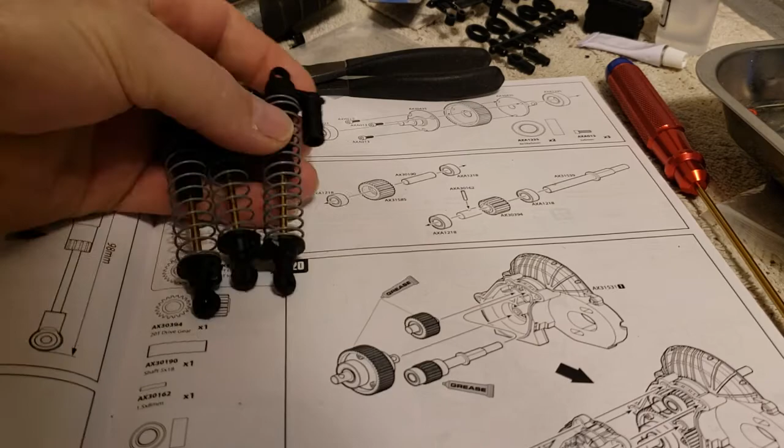I built all the shocks pretty much last night, three of them, that's all of them. But anywho, I left one.

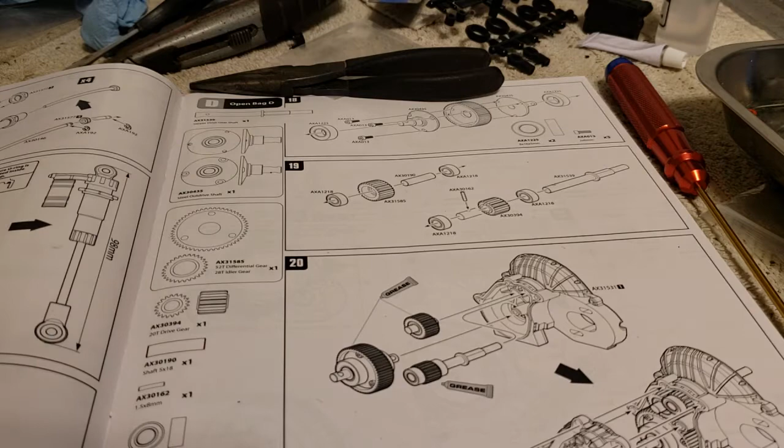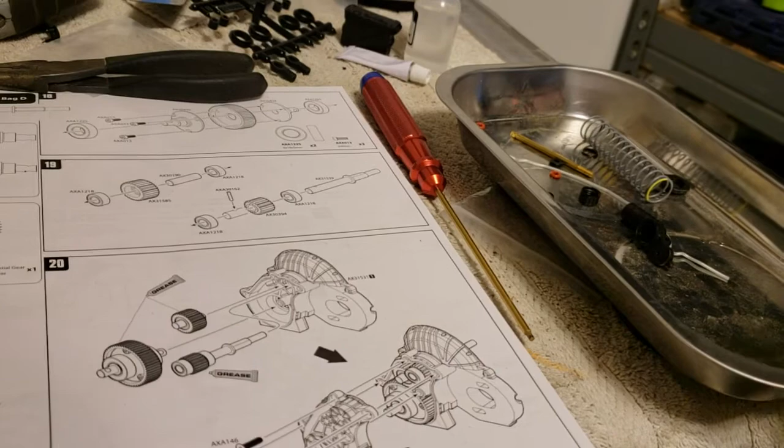Something kind of important in my opinion if you're doing work like this, especially the smaller stuff: get you one of them magnetic trays or some kind of tray that holds everything. Makes it a lot easier on you.

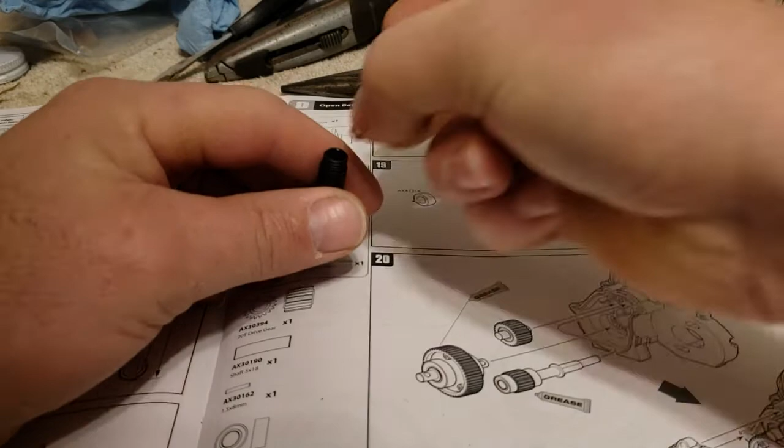Shocks are simple. There is an O-ring that goes in the bottom. There is also a little tiny hard plastic washer that comes off of one of the parts trees that goes in there as well. You have to make sure when you put that in there, you trim it really well, making sure there are no rough edges. I don't know why, other than it's a tight fit, so it kind of pushes on the exterior of the housing, which is going to oblong that little washer. So I guess I do know why, but that is that.

Put them: two O-rings, the washer, O-ring, then your cap. That's your seal for your shock, keeps your shock oil in there.

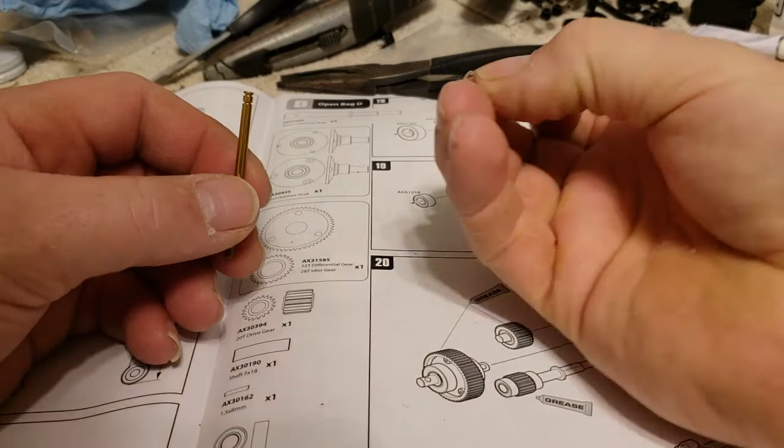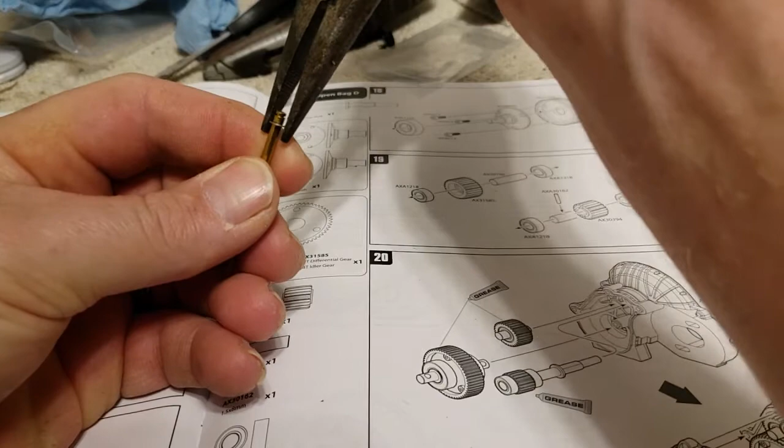Here's the sucky part: these little tiny E-clips are so much fun. Now normally I do pretty good with them, but I'm recording, so I'm sure I'm going to do really bad with them. But I can tell you, they are so tiny, if you screw up and one of those pops off, they will take off on you, which sucks.

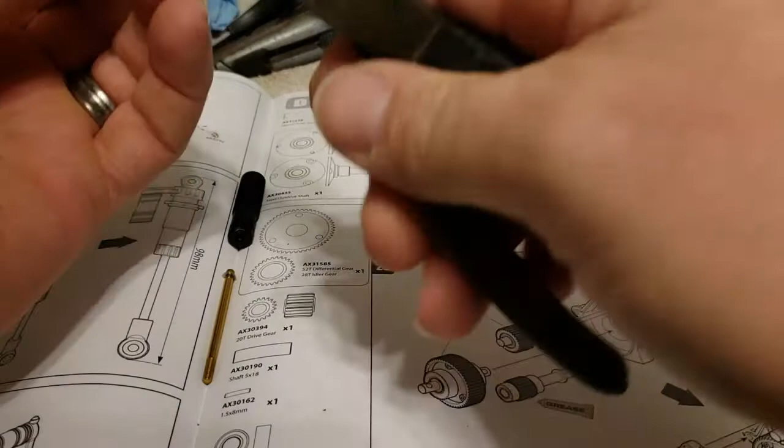E-clip, over top of the E-clip goes a little hexed part. It comes on your parts tree, and my lazy hind end did not trim that one last night. These aren't as particular, they do have a little bit of room to move, but I do not like those big chunks of plastic just hanging there.

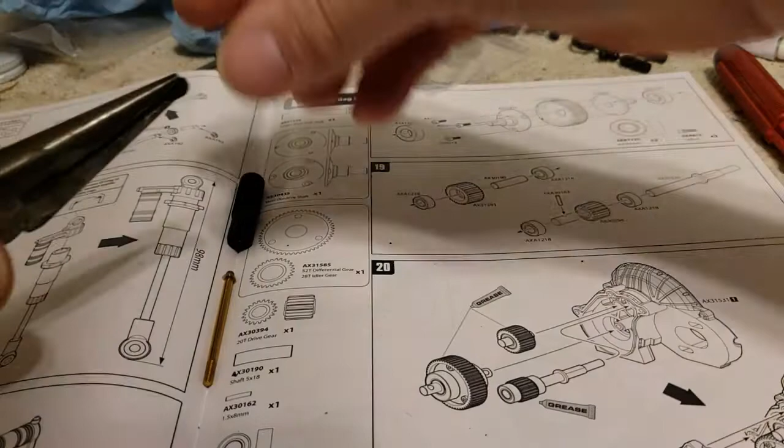All I'm doing is taking my razor blade and trimming the edge of that off. But once that's done and cleaned up, put that on right there.

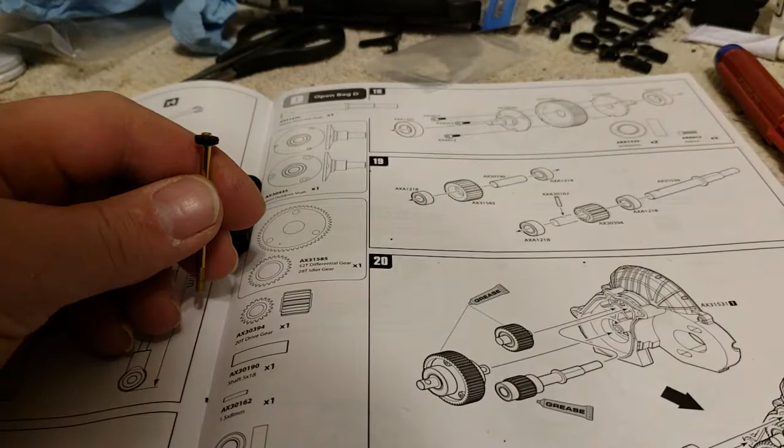Then there is one more E-clip. Monsters, so big you can't even tell when you pick them up. Lick your fingers a little bit, it'll stick right to it. Same thing there. Now I use needle nose pliers.

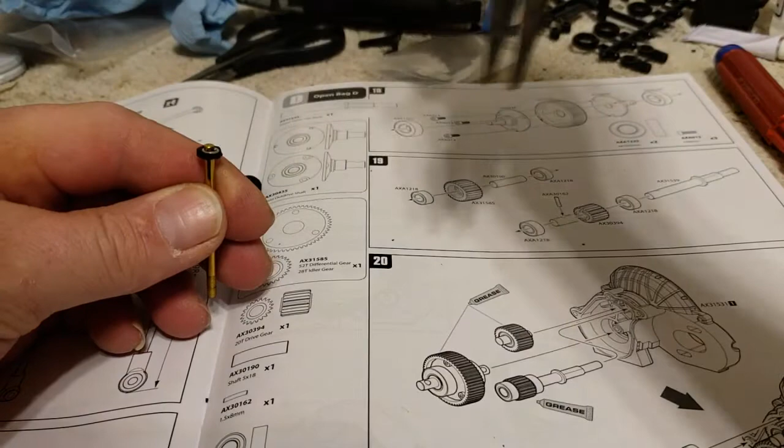I like to use... sorry, I'm concentrating. I like to try to use the tweezers. I have a set of really heavy tweezers, but when I go crawling I pack them up with me in my kit they come in. So they're in my bag, which is buried behind me, but I'm too lazy to go pick it up.

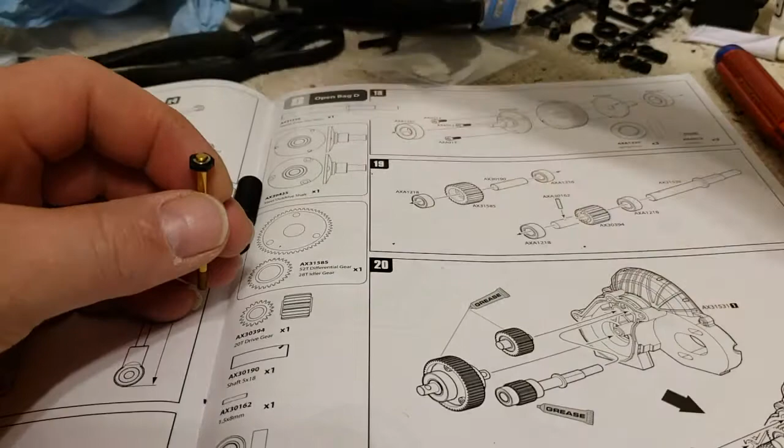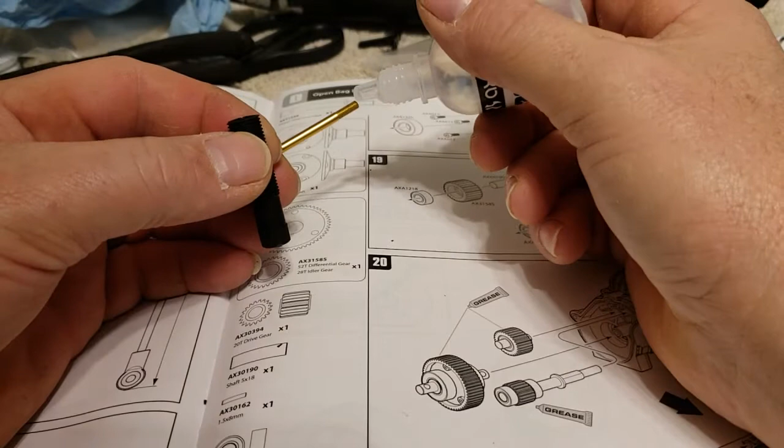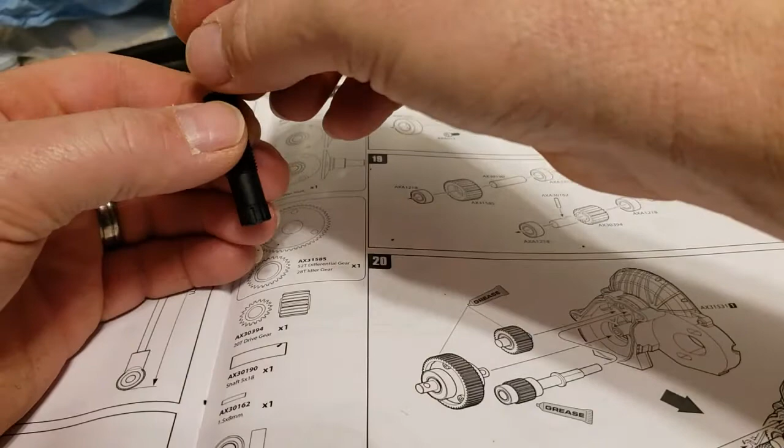Oops. Now this is another thing, just me, I don't know if anybody else does this, but you are running through two O-rings. So I put just a little bit of oil on the tip of that, a little lubrication goes a long way. Find the hole... so terrible. Pull that through there.

On the parts tree as well is an end for your shock. Now these are always fun to get started, they will sometimes look like they're crooked as a dog's hind leg. Not a big deal, I come down close to the thread with a pair of pliers, make sure I grip it good and tight, and that way it doesn't spin.

That little bit of marring, if you get any, is really insignificant. If you get some heavy marring you need to clean it up, but as long as you don't get heavy marring... and that one actually spun on me. Okay.

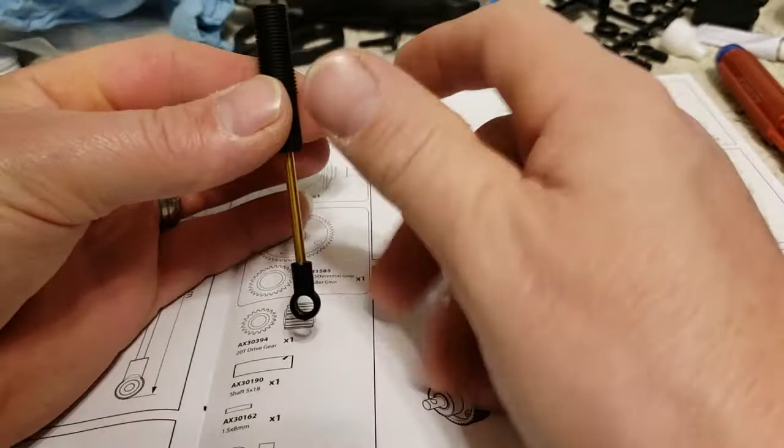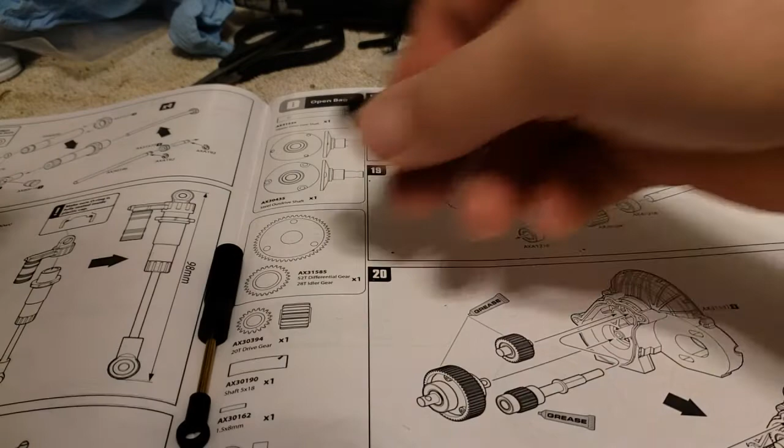This is your shock cap, the top of your shock. I am kind of disappointed in the fact these are complete plastic bodies. I would have thought that they would have at least used an aluminum body.

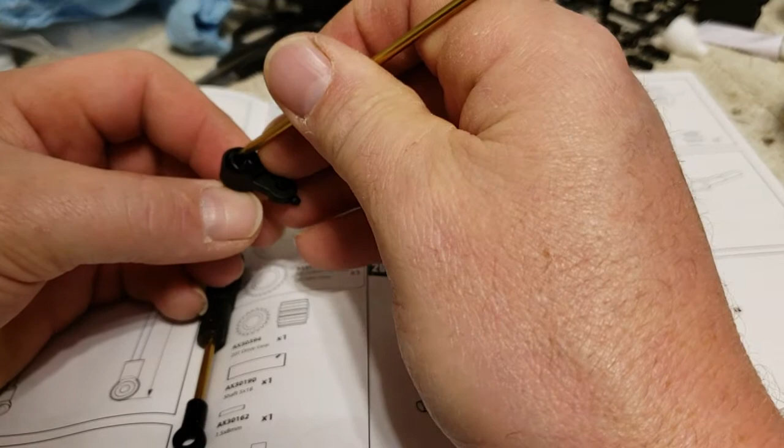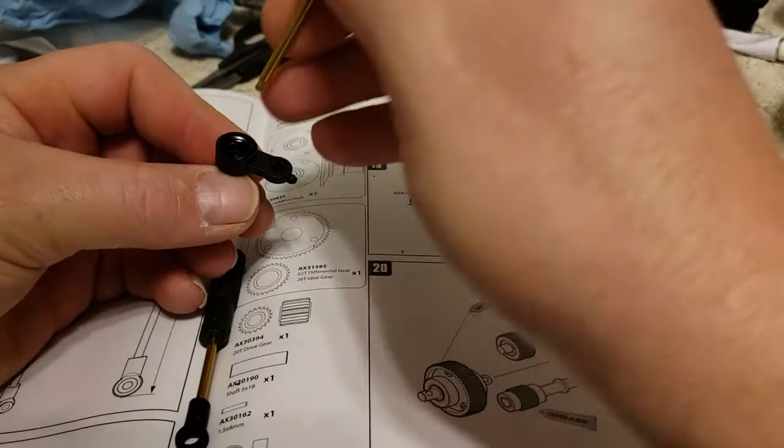But for the price of this kit, this is the SCX10 II builder's kit - sorry I didn't mention that in the beginning - anywho, it is a really good price.

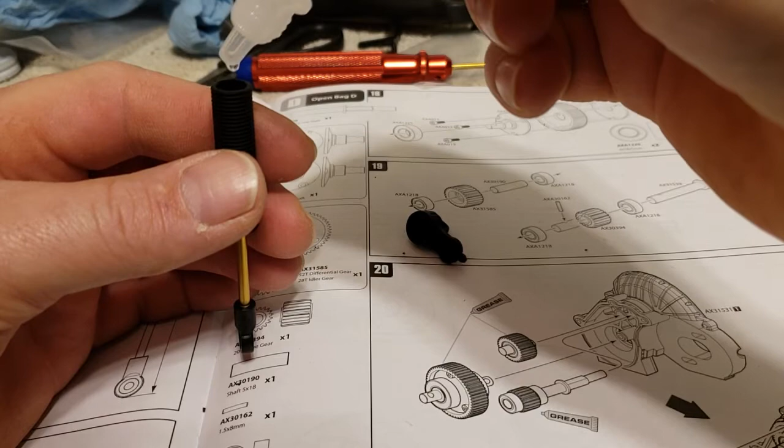Once you put the O-ring in there, you can get it for $200 just about everywhere. I have a hobby shop that takes really good care of me. I don't spend a lot of money with him, but I used to get bonuses through work here and there, and when I did, I normally went and bought an RC car. So he knows me pretty well.

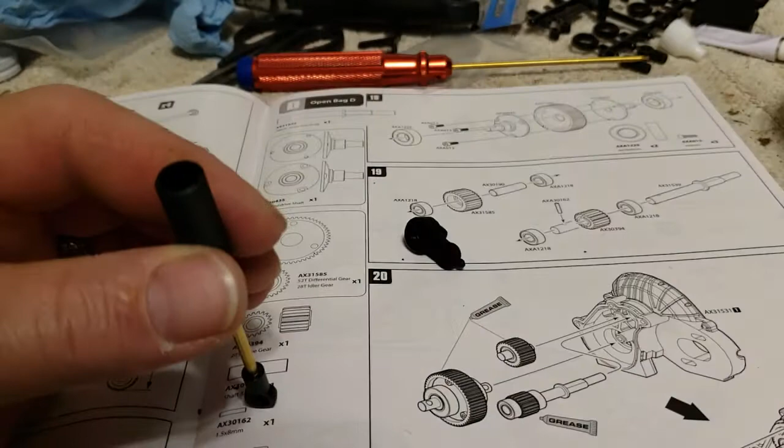I pulled that shock all the way down to get the oil to come down below the thing, and I'll run her up and down a couple times, pull her back down. That one is actually a good bit low, so I will bring it up just a little bit higher.

Now I leave that down a little bit, and the reason I do that is because I'm falling asleep here and screwed up. You got to put this adjuster nut on there. If not, your spring will not stay on where it should, and you won't be able to adjust it to get your height or load or anything.

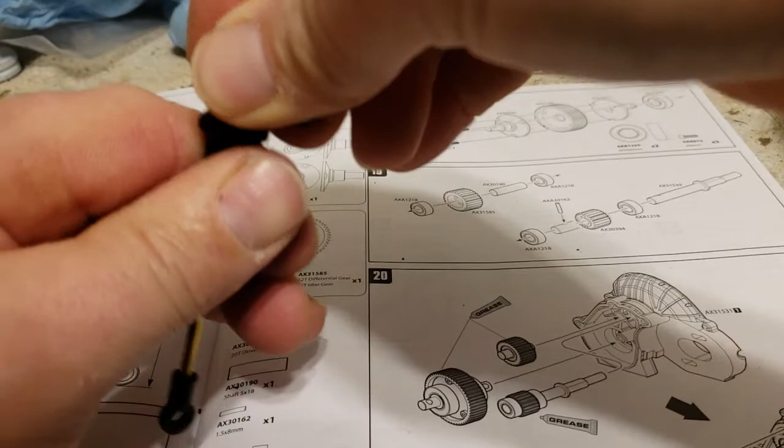So once you've got that set to where you think it needs to be, put the shock together, crank that sucker down. Okay, I've got just a little bit of resistance at the top edge, but it is coming up good.

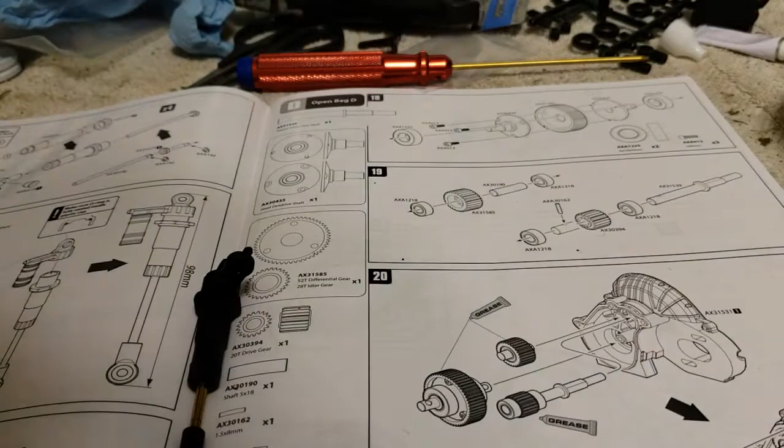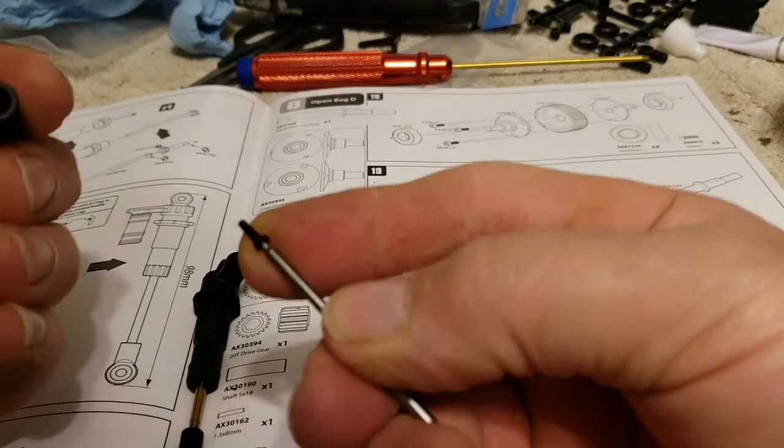So that's that. There is an imitation reservoir in the bag of the shock kit. It comes with these little tiny screws that just go in this part of the tree. It's an expansion chamber, imitation. Put a little screw in there like that, and you get the job done right.

There we go. Man, I forgot to trim all this stuff last night. I thought, well, I'll trim it in the morning when I'm awake.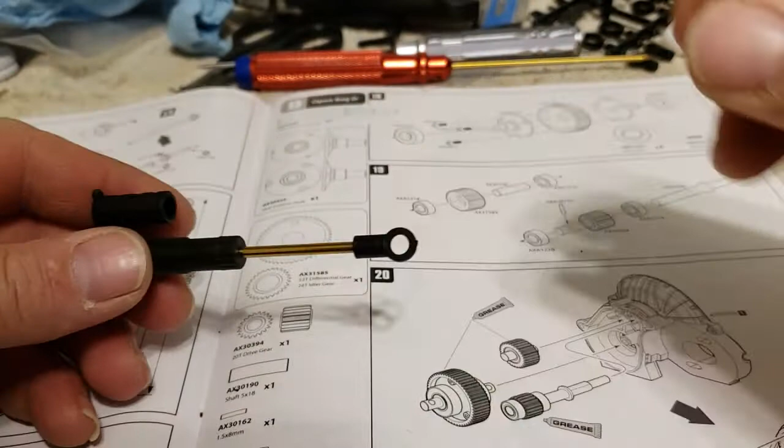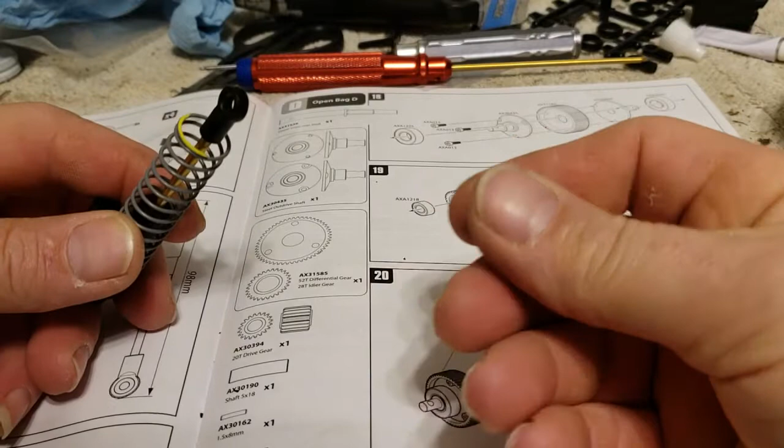But there's that. Once that's assembled, you can do that before or after, it doesn't matter. The springs are two different springs. I don't know how much of a difference honestly, but the yellow ones are what they consider the fronts, I'm pretty sure. Yeah, I told you right - yellow front, white rear. They just got a little white paint or a little yellow paint.

So once that's on, seat this back onto there. Wham bam, thank you ma'am. Those are done. Something I did forget to do on your parts tree - these little dudes, they're your hinge joint pivot points. I guess, I don't know, on the shock they still consider it a hinge joint, but I'm going to call it that.

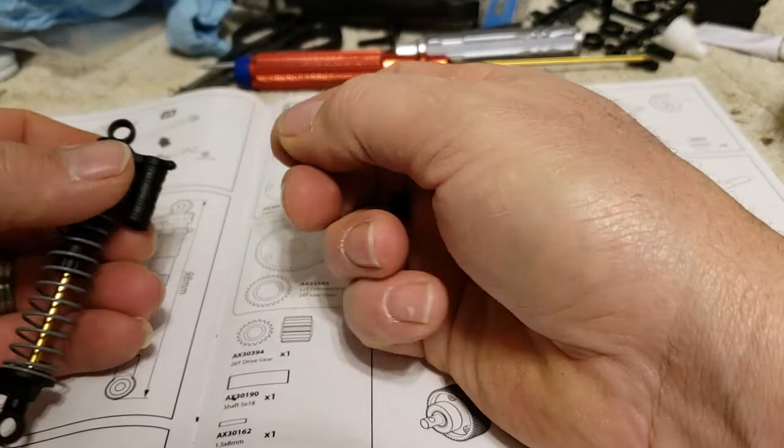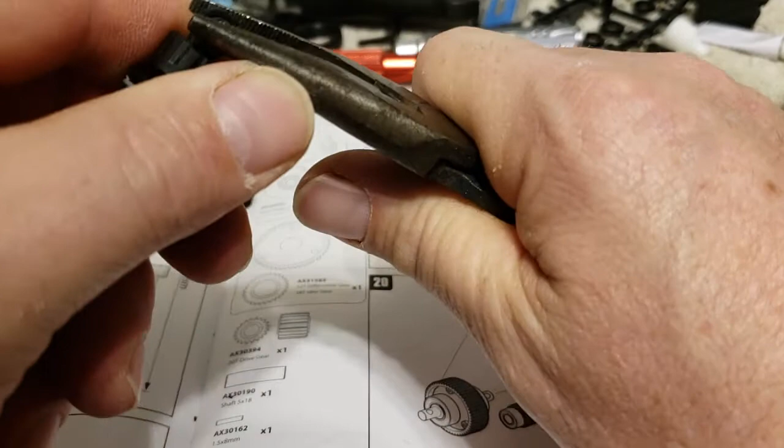If I'm wrong, you can send me a letter, an email, smoke signals, whatever, because I can't use my phone to make the call, it'll die. That's such horrible service. It took about 4.5, 5 hours last night to load my first video of the Axials. Very, very annoying. And I have Wi-Fi.

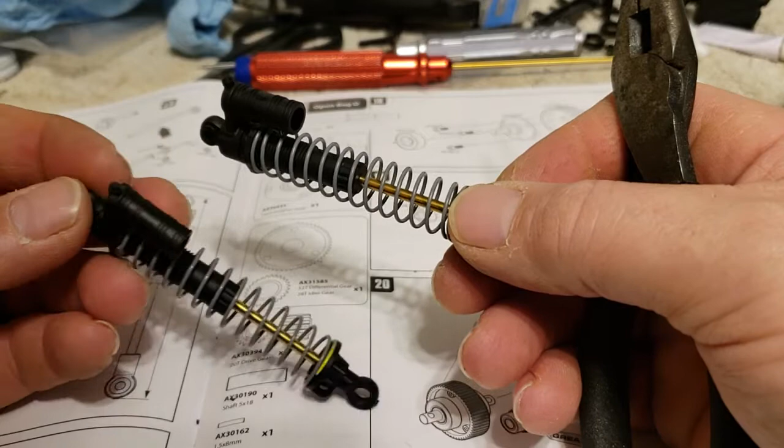Alright, those little dudes, I put them in there. Most of your joints, they'll fit pretty easy. But when it comes to the knuckles here on your shock, they do fit a little tight. Now these down here, doesn't really matter. The top ones though, if I put this to the inside, then I'll kind of put it to the outside, I guess you would really say.

But once it's mounted on the truck, it'll be double inside. I do try to line that up.

Like I said, guys, I know these - I've watched enough of these videos myself, and they're not always okay. I know this, but there might be somebody out there who doesn't know, or there might be something I do different, and you want to question me, or tell me that I'm ate up in the head. That's fine too.

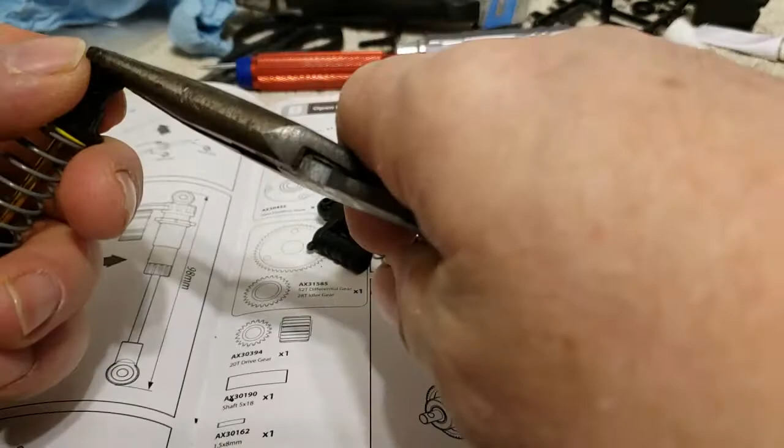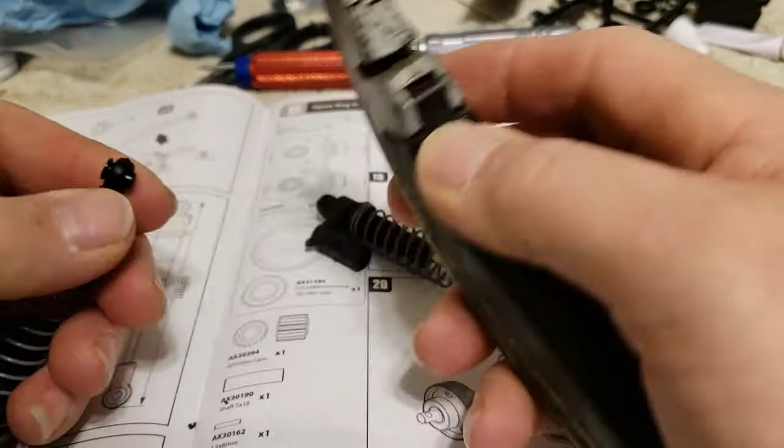Criticism's criticism. Just a little trim in there - tried to cut my thumb off, but that's alright, I got another one. For some reason I missed all those little pieces, not that it's a big deal, but let me trim them all up. Don't have to, it's just going to look nicer. It's not affecting anything, it's not going to get into it.

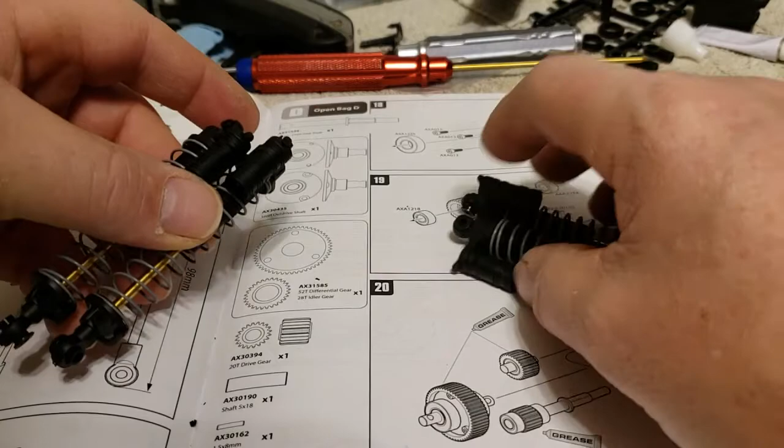Alright, there are all 4 shocks. I'm going to say complete, then I'll look them over and make sure. All 4 shocks complete - looks like I got 2 and 2 matching. So I'm going to put these actually in the box, because it does not show you to put them on yet. While I'm doing a build like this, I will put my parts in the box until I'm done.

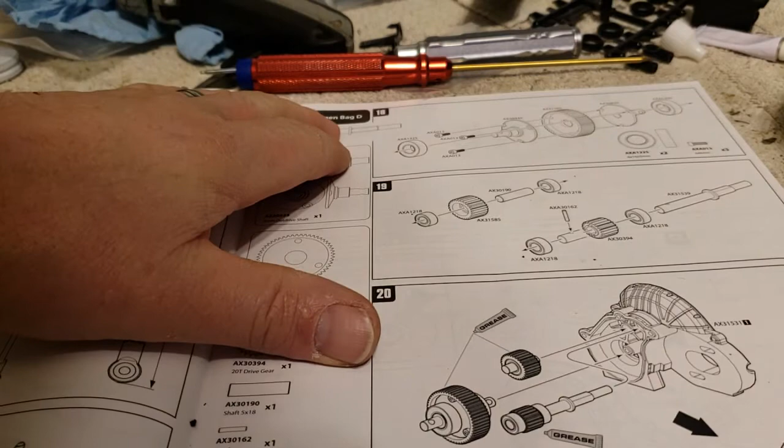Looks like everything I need for this next step, which is a transmission, is in bag D. I'm not going to do this part today just because I took so long to build one flipping shock. But I'm going to pull this plastic out of the bag.

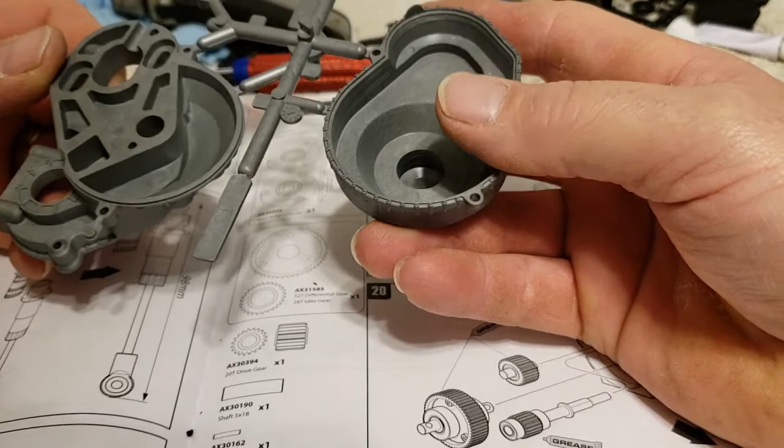Now, I was looking at this before I pulled it out of the bag. This is the new style transmission for the Axial. And I will say that the thickness of this material is phenomenal. I mean, this case is not metal, but my goodness, it is thick, heavy material. So I do believe this transmission casing is going to hold up, as long as the gears, which I haven't looked at yet, so I'll go give them a look. And then I'll start another video hopefully soon on building the transmission.

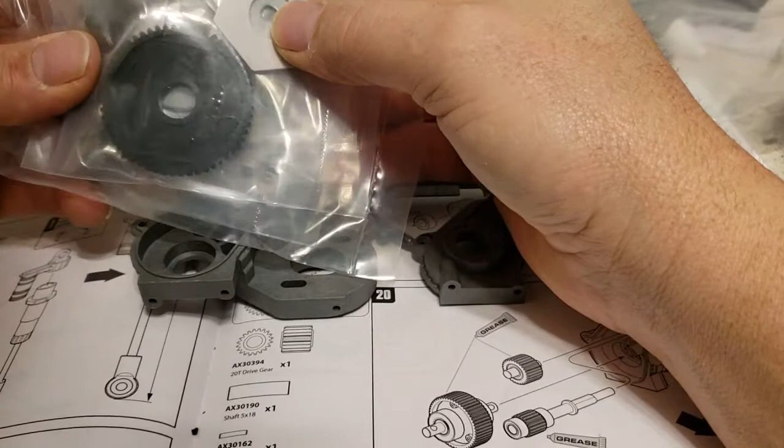Looks like we got a lot of metal here, but I am seeing a plastic spur gear. But that's cool - sometimes a little plastic is good. It gives you something to break before you destroy something massive.

But like I said, I did want to show you guys how much heavier this case is. I wish I had one of the old cases - I do, down there in my box, but it'd take me 30 minutes to get it. So let's see if I can find one real quick.

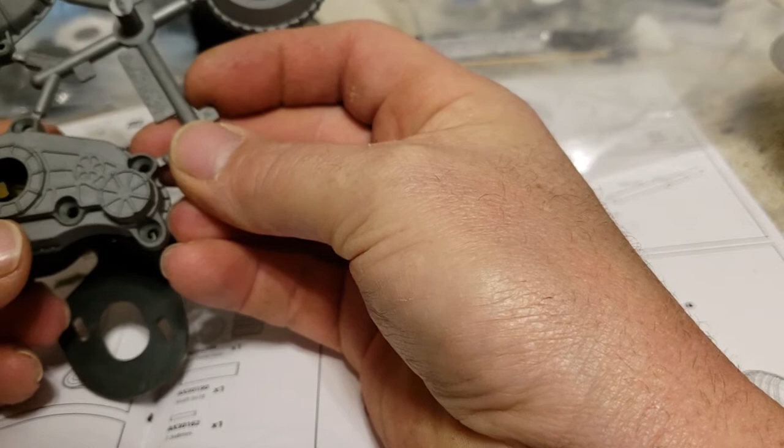Alright, size-wise it is really dang near the same - a little bit bigger, not much. If I had to guess, I'm talking millimeters. Now the output shaft hole is a lot bigger, so that means that bearing there must be a lot bigger. But I'm going to take this piece off.

This has got all the gears in it. No, it doesn't - this is the one I'm missing, the center gear. This center gear here is plastic, and I busted this one. This is actually just a spare case. But with this mostly together, with the slipper assembly on it and a metal plate on the front, it is still lighter than this. So this body is going to hold up good, I believe, as far as transmission bodies go.

I've never broke a tranny body. I don't know - I'm sure somebody has, I'm sure one's come apart. I have grooved one where a bearing went sour.

Anywho, that's it. I'm going to get some stuff cleaned up. Maybe get started on the transmission today, maybe not.